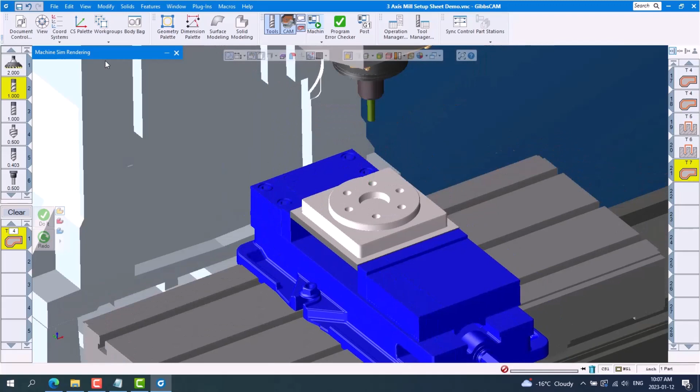In this tech tip, I'll show you how to produce a setup sheet from GibbsCAM that you can use to communicate with the shop floor to avoid costly downtime during the setup process. Downtime can happen when the setup person is searching for things like material, tools, holders, programs, and fixtures that were included during the programming process.

Setup sheets are an important communication tool between the programmer and the shop floor. Next, I'll show you the types of information you can include from GibbsCAM and how to customize the look of the setup sheet, which includes your very own company logo.

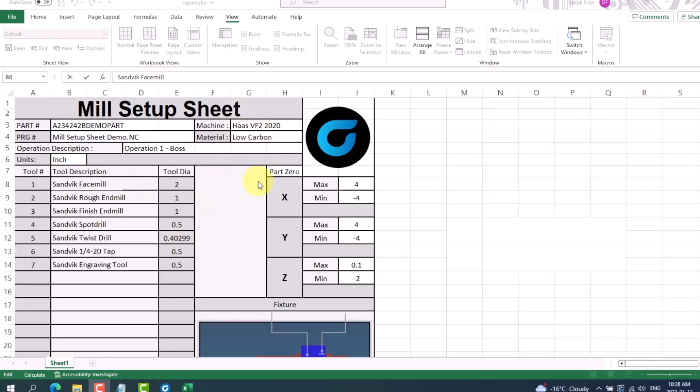Some examples of information you can include directly from GibbsCAM are part number, G-code file name, the operation description, units, tool numbers, tool descriptions, tool diameters, the machine, the material, part datum, fixturing, and an actual picture of the part.

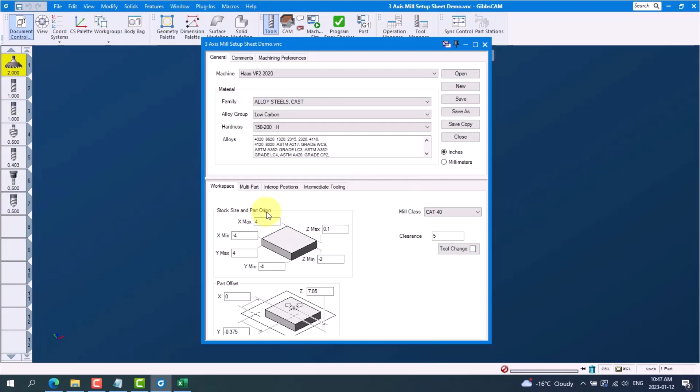Next, I'll show you where this information is coming from in GibbsCAM. If we look at our document control, this is where we get our machine, material, units, part, stock size, and origin. And if we go to the comments tab, this is where we get the part number and our operation comment.

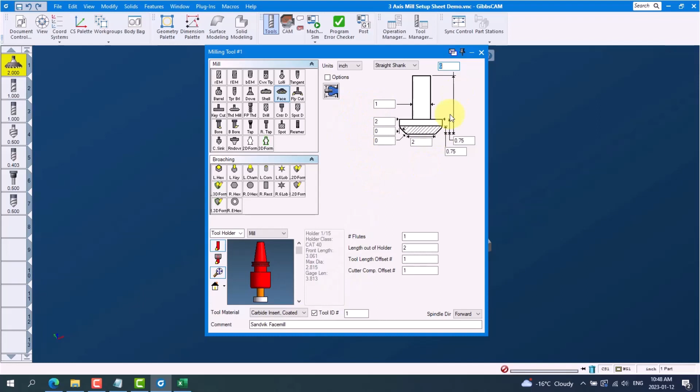Next, if we look at a tool, this is where we can get our tool number, our tool comment or description, and our tool diameter. Other information can be added to the setup sheet as it is fully customizable.

With a report like this setup sheet, there are two files required, an Excel file and a text file with the same file name. We have provided a setup sheet template. You can download the two template files in the description below and drag both of them into the report folder on your workstation shown here.

Here the two files are in the downloads folder, and now I'll show you the file path: C drive, program files, Cambrio, GibbsCAM, the current version you are using, plugins, data folder, report. You can copy the two downloaded files, the Excel file and the text file, and drag them into the report folder.

You will need to provide administrator permission to move to this folder. You can click continue, and continue for the next file. And if I open the report folder, my GibbsCAM setup sheet is in there.

The Excel file includes the layout and look of the sheet itself, including titles and pictures such as the company logo. I'll now show you how to personalize it by copying your own logo into the setup sheet.

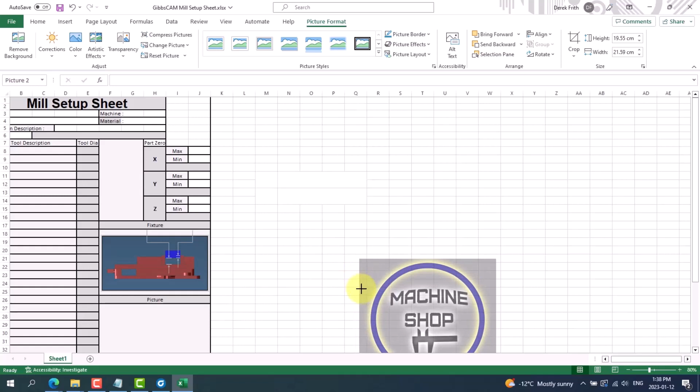And this is the space here that I've set up to copy my logo into. So I can go up into Insert, Pictures, From This Device, and I've saved the logo on my desktop. So I can go to my desktop, choose my logo, and insert it. It'll be inserted into Excel, which I can resize and simply put into place like so.

So once I have this logo in place and I'm happy with the look, I can save it. Go to File, Save. We now need to close Excel to allow us to copy the file over.

I'll copy the file from my desktop and drag and drop it back into the report folder. It'll again ask me to provide administrator permission to move to this folder. Click Continue, and we can see now that our setup sheet is in the proper report folder.

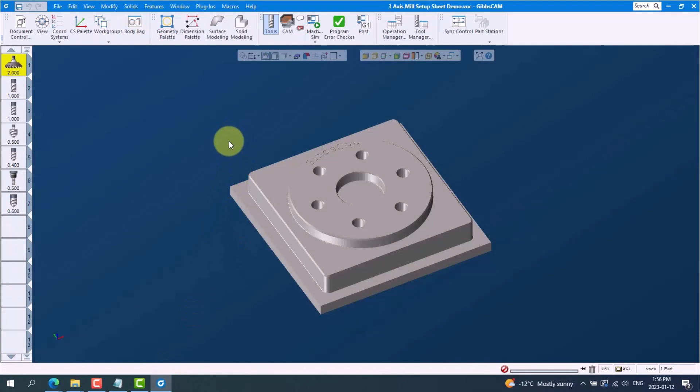And now we are ready to go back into GibbsCAM and follow these steps to print. We need to go to Plugins, under Main Tools we go to Reporter. Click on the Custom radio button, find our new setup sheet in the list below, and press OK. GibbsCAM will load Excel and produce a ready-to-print setup sheet.

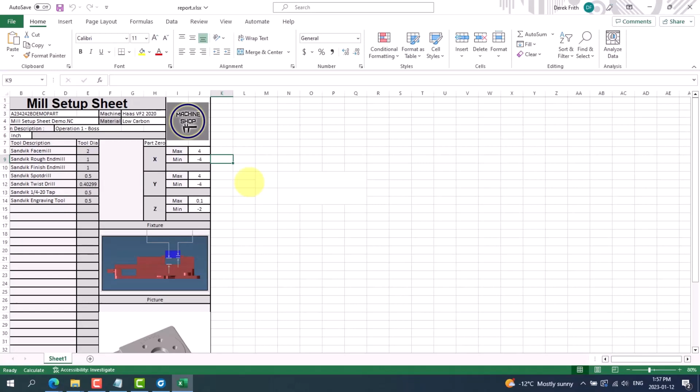This can now be printed and handed over to the shop floor. Go to File, Print.

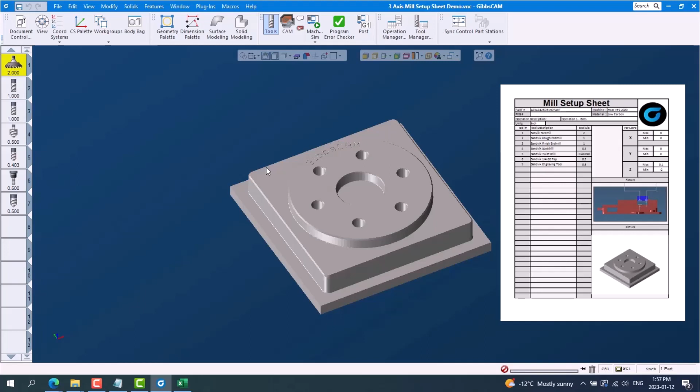Creating these custom setup sheets will help you bridge the gap between the programmer and the setup team, ensuring a smooth transition from GibbsCAM to a completed part, which saves valuable time. If you would like to learn more about creating or modifying a setup sheet, please reach out to your local GibbsCAM reseller.